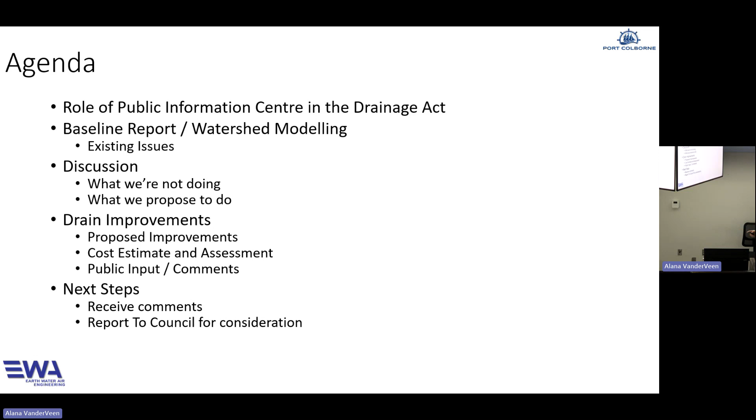If you have questions, I'm going to go through the slides very, very quickly so we get to the end. Then if you want, I'll back up to any slide you have a specific question for. This is where we are in the process - this is Public Information Center number 2.

Our goal is for me to deliver a final report to council for them to consider. They hear it three times and it gets passed as a bylaw. We do the work, it gets billed out - that's the general scheme of things. All the stuff on the right-hand side is the approval process once the report is done.

Right now, if you have specific concerns, I can fix it before the report goes to council - that's the purpose of this meeting, for me to hear what you would rather have or would like to see different. We try to accommodate everyone's views. We can't accommodate everybody's views, but we try.

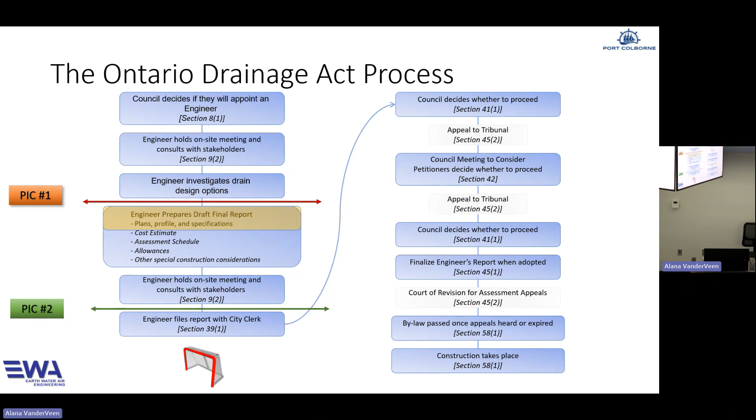We did do a baseline report. The baseline report looked at what's already there, looked at the problems, and this is supposedly looking at solutions. I'll tell you what I think solutions are, and you can tell me whether you agree or not.

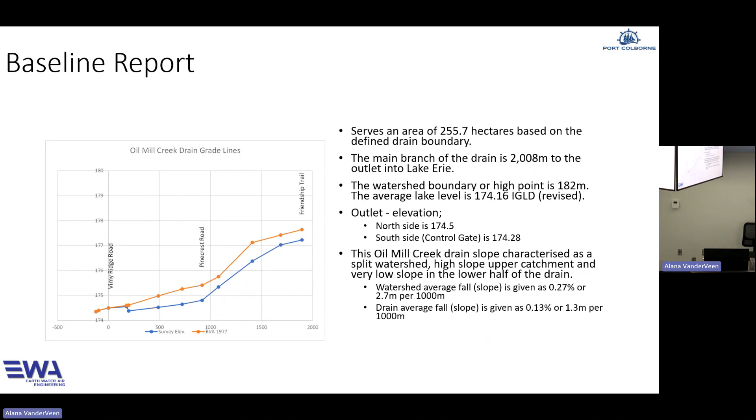This is just looking a little bit at the survey elevation versus the original report from 1977. The survey shows we're a little deeper than the original 1977 report, but I'm converting that from feet and inches, so there's a little bit of funny business going from 1977 feet and inches to metric. It's important to look at the general shape rather than exactly where those points are.

What you'll notice is that this drain is not a straight drain that goes from the lake straight up and ends at a bunch of farmers' fields. There's a lot of different pieces and parts. The E1 branch - I was going to point at the screen, but I don't know how to do that, there's no, yeah, thanks Alana - E1 branch runs up and goes backwards to the east. The main drain goes straight north up to the Friendship Trail. The west branch does this southwest wiggle that goes out past Pinecrest Road. And E1, E2, and E3 are off to the right by Cedar Bay Road.

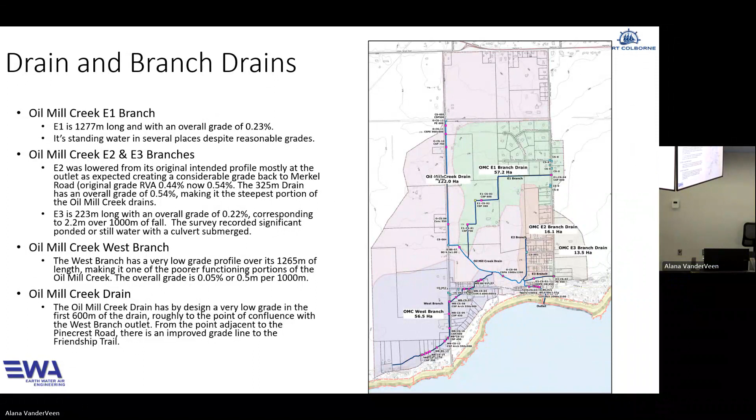This is just looking at the relative slopes. As you go north, E1, Cedar Bay, and Oil Mill Creek increase by 2.8 meters over their length, which isn't bad. Port Colborne's not famous for having a whole lot of slope to the lake. Some parts are pretty flat. Wignall Drain is 2 kilometers with zero slope. So in comparison, this isn't too bad, but the west branch, the blue one, at 0.64, doesn't have a lot of slope. It's what we would call terrible for slope.

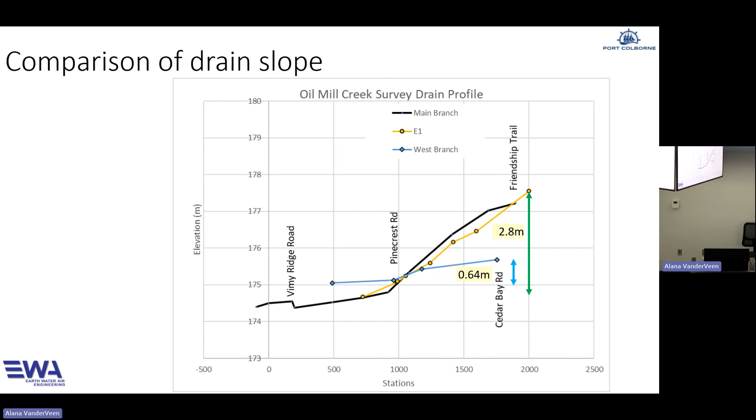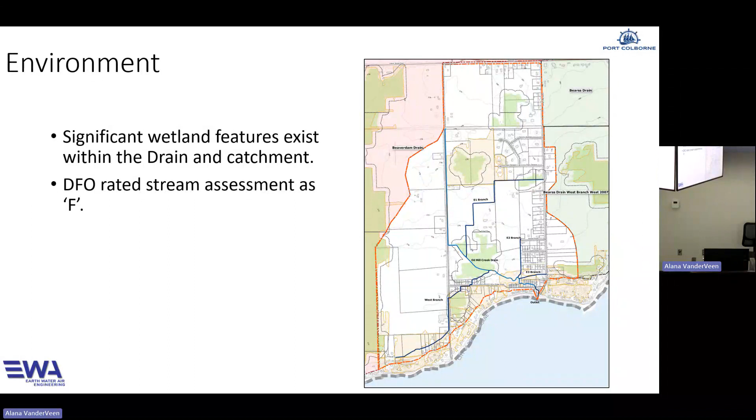There are wetland features that exist in the drain, and when you have compromised slopes, there's wetlands there. The benefit for us is the drain existed before the wetlands. If we go forward and say we want to drain a wetland, generally that's hard to do now. But if the drain existed before the wetland, then we can go in and do maintenance and make changes. But there's limits to what we can do and get approval for in an existing provincially significant wetland.

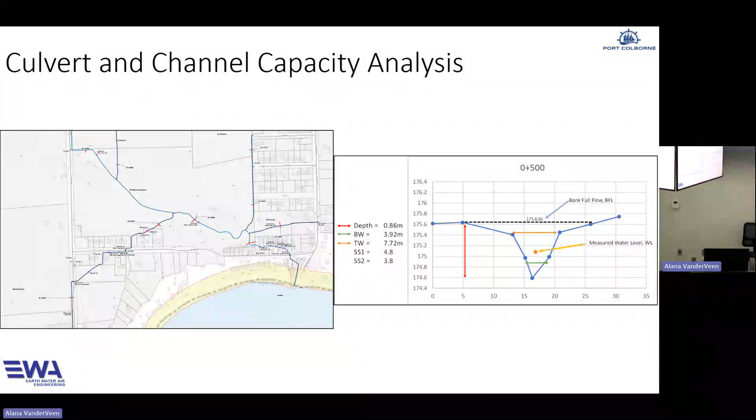So we set up a computer model and we analyze how this thing performs. The surveyors do cross sections and we calculate whether hydraulically it will pass enough water or not. And we build a computer model, and it looks like this. It gives you a profile of what the depth of water is going to be at different points in the watershed.

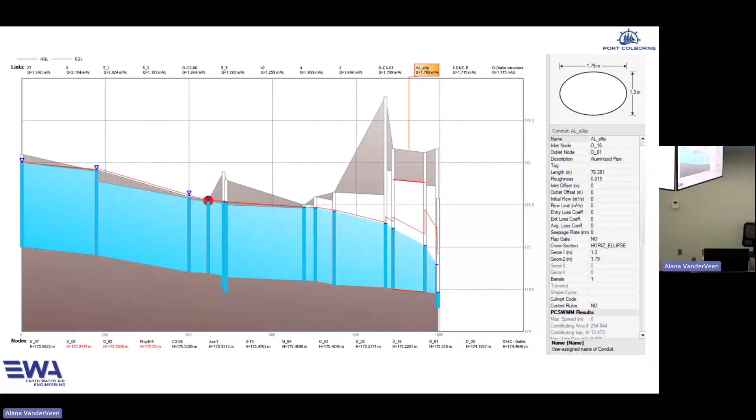The reason we do that is to find out what the problems are. One of the issues is that West Branch is so flat that its water arrives later than the water from the upstream parts. So by the time it goes out to the lake, everything's already full - that's what the basic computer model shows. And all of you will say, I could have told you that, you don't need to build a computer model. But we do the computer model because as engineers, that's what we like to see analyzed.

Maintenance has been performed, as Alana said, in 2008 and 2011. But in subsequent years, well, you guys know what the maintenance was. Culverts - there are a few structural defects, some that are rusty or at risk of collapsing. We've identified those for replacement. Some culverts are not quite as big as they should be, so we identify some that should get installed a little bit bigger.

The winch that controls the flap gate is a total manual affair. You have to walk out and stand on top of the outlet in order to operate it. And when the water was much higher two years ago, that was a little dicey at times. If you were late getting to it and the storm was already on, it was a tough place to go and operate the winch.

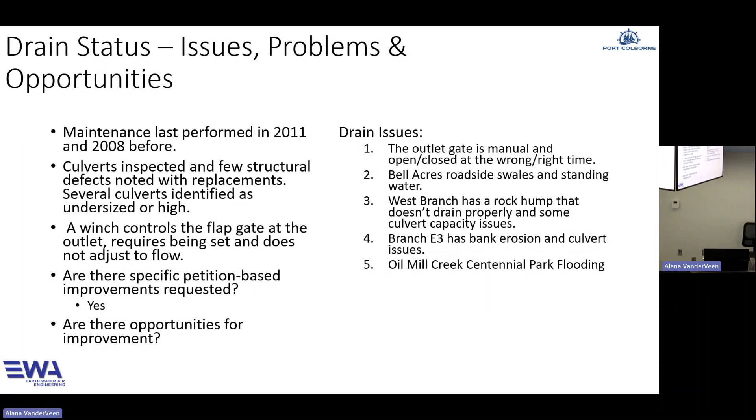So drain issues: the outlet gate. Bell Acres has problems in roadside swales, standing water. The West Branch - this goes back to the very beginning. When it was first created, everybody knew there's a rock hump in it. The original engineers identified on the plan to put clay in to try to level it out so it would drain properly. And E3 branch has some bank erosion and there's a culvert issue. And there's flooding in Centennial Park. So those are some of the things that we looked at.

And these are some of the things we looked at and we're not doing - which maybe that's a funny way to say things. But we looked at things, we tried to find a solution and it didn't quite work out. That's these things. So I'll actually come around here so that it's easier.

Start at the very top - whether we could do 2 new outlets. The existing outlet is a steel pipe and then a concrete pipe that goes out to the flap gate outlet, and it's flat. So the water has to get to a certain height to drive itself to the lake, and it has to actually get really full. I've got another slide showing this - for it to be a full pipe, it's very difficult for the pipe to run full.

So we looked at whether we could do what's called a diversion. When the water gets to a certain height, it has another path it can take to the lake. This runs through the middle of the park, and then there's this one over here. The trouble is the one through the park, if it's an open channel, it's massive - it's like 10 meters across the top because of the way the sand is to go out to the lake.

And if you use a pipe, well, it's not a path we can take without losing trees. So there's a challenge, and the pipe's not cheap. These do work, but you're looking at $250,000 for either one of these to go ahead. So we said no.

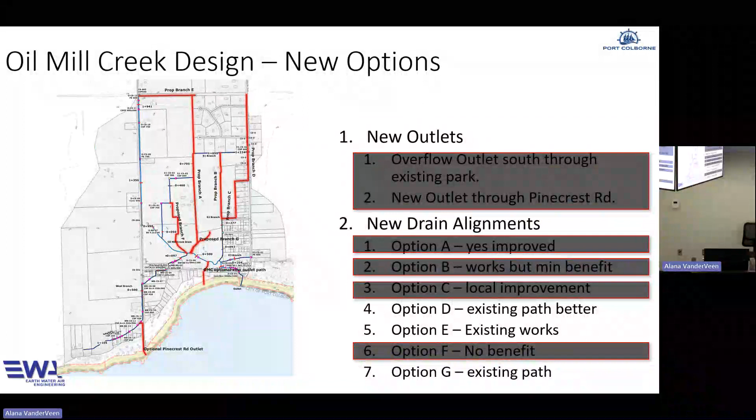So the part that we did do is the one that's west along the subdivision. There's already a channel there, but there's a way, and it's in the report and I'm talking about it tonight, how we make it part of the municipal drain. I think that's it. So what we'll talk about next is what's next.

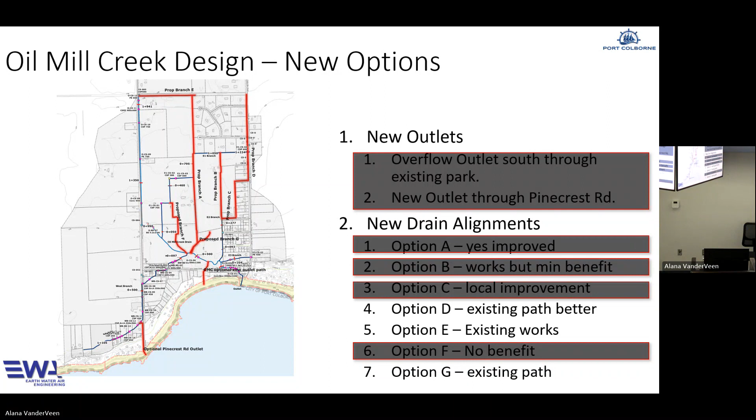So this is the one that goes up and to the right. There's flooding at the back of these lots, and this does solve that. But there's no way for me as an engineer to make this go forward. I need a petition - someone has to sign a petition to say they want this drain. So if you live in here and you're interested, and you can get half of your neighbors to agree, this could go forward and be part of this project.

Tell us more specific. We're hard to see.

So you have an access off of Cedar Bay as well? Oh yeah, there's no access there, but like my property does first. There's no driveway, so this proposed catchment goes to where his property touches Bay Road. That's kind of the basic part of it. The trick here is if we went to the road, then she could sign the petition and it can go forward. But in this case, the road's already serviced by a roadside swale and it works, so we can't really get the road to sign a petition. You'll see with the subdivision, we're using her as the road authority - Alana's being the road authority and signing the petition so the other parts can go forward. But in this case, we really need all the neighbors to agree.

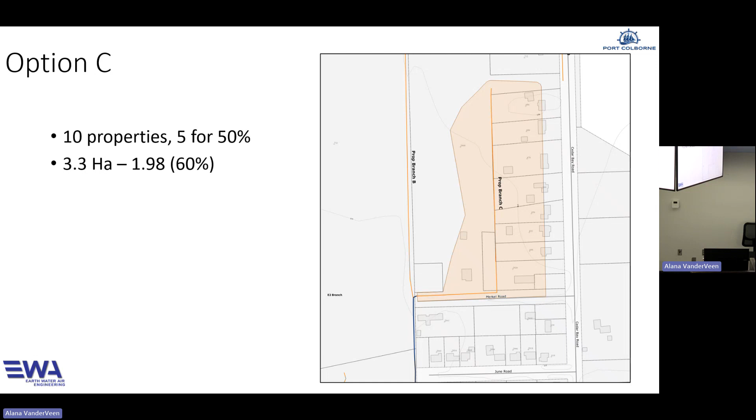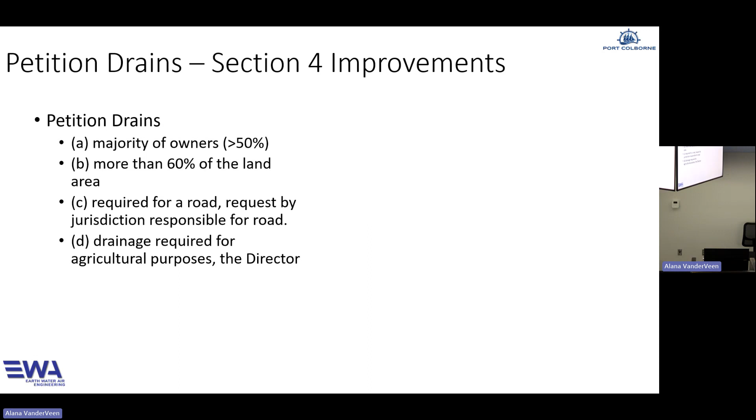This is about petition drains, where C is required for a road at the request of the road authority having jurisdiction. The other one, D, is by the director. I don't understand who that is under the act. I assume it's the minister or an appointee, but I haven't seen one where they've actually exercised D.

We did analyze returning the pumping. If anyone's been near the outlet, there's a little oval tank off to one side. In the 60s, I think it started being pumped, and there's a discharge pipe. We analyzed and estimated the cost to return it, not replacing the pipes, keeping them as they are. But I'd be concerned about whether they would survive a new pump, because the pipes are rusty and old, but sometimes rusty and old pipes are still okay.

We didn't analyze whether the pipes would hold together. But it's like $135,000 to put new pumps in there and bring three-phase power down from up at the intersection, basically where it is. We had a quote from Fortis for what that would cost.

The pump pulls from the pipe and then pumps through the little rusty pipe out to the outlet. It's just not doing enough the way it's set up, from the 60s, with the big steel pipe extended to Vimy Ridge Road, to be that much of a benefit. If you're going to spend that much, you might as well reconfigure the whole pumping system to pull from where it's open, not piped, and have a whole new path that goes to the lake. But it'll be more than that. So we've analyzed this. There's a small benefit — personally, I'm not sure it's worth it.

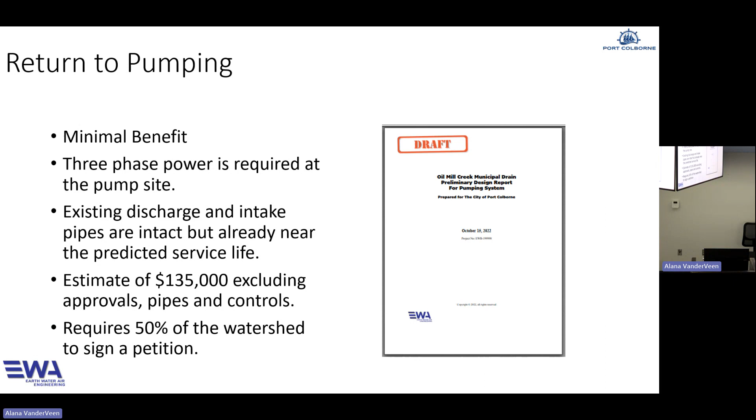So what we are doing — in my search through this, I found this letter from 1978. It's to the city engineer at the time, about what they looked at back in 1978. Not surprisingly, a lot of it's the same stuff I'm talking to you about tonight. The difference is in '78 they didn't do anything. They looked at a new outlet to the lake and decided it was cost prohibitive.

They looked at changing the flap gate to what's called a knife gate or a sluice gate, so instead of opening and closing, it goes up and down. The problem is someone still has to make it go up and down, so in my view it doesn't work any better than one that opens and closes.

There was flooding along Cedar Bay Road, and they said if somebody petitions for a new branch, that could go ahead — what we just talked about. Flooding around Vimy Ridge Road, they looked at an outlet through the park and said it would be too big of a channel. The outlet through the park, if it's a pipe, it's reasonable to see it could go, but it's still going to cost a significant amount of money.

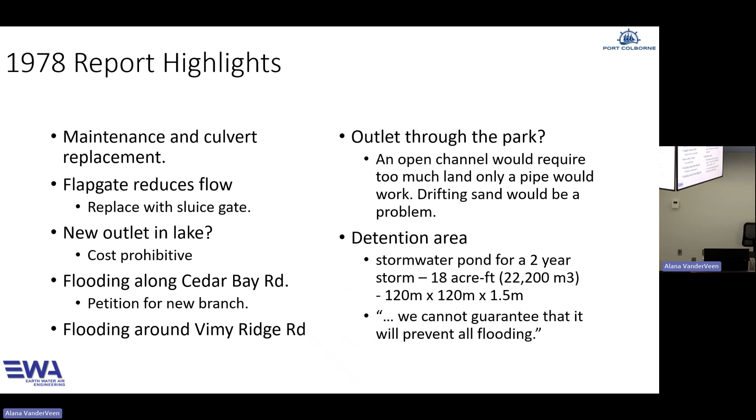And the last one, they looked at the detention area and calculated it would need to be 18 acre-feet, which for me, metric, is 22,200 cubic meters — massive, way bigger than what we could fit in the park. So we have analyzed and recommended putting in a wetland, but it's not that big.

So, control structure considerations — we talked about pumping. The existing pump structure hasn't operated for a long time. It's possible to put it back in service. I can't tell if the pipe that draws water into the little oval — it's got rust in the bottom, mostly it's okay, and the pipe over the top is rusty but mostly okay. But you could run it for a month and then break something, and then you're stuck fixing and replacing the pipe.

Control structure: runoff flow through the openings for a 1-in-100-year storm — it's a big pipe. There's a storm surge, so the gate closes, but it's on a winch. We looked at modernizing it. We have some other modernizations at other places in Port Colborne.

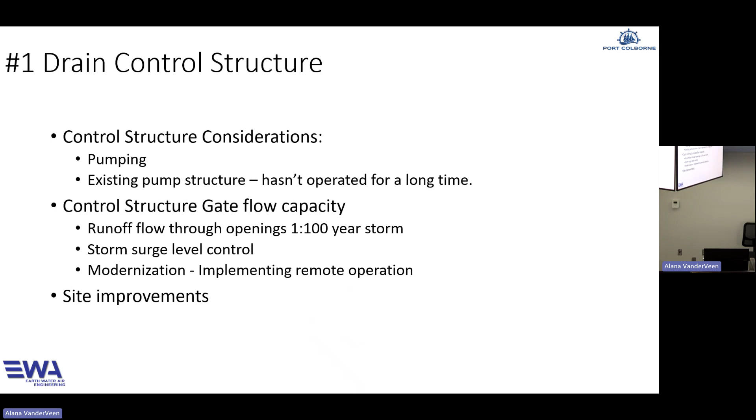So there's comparisons — this is what the computer model says happens at the outlet. I'm going to point out a couple of things to orient you here: Vimy Ridge Road, this part, it's a rectangle — that's where it goes from open and crosses the road. The other side, right through here, is the steel pipe that was put in 1999. The concrete is this last little bit, and the last little drop here is the outlet.

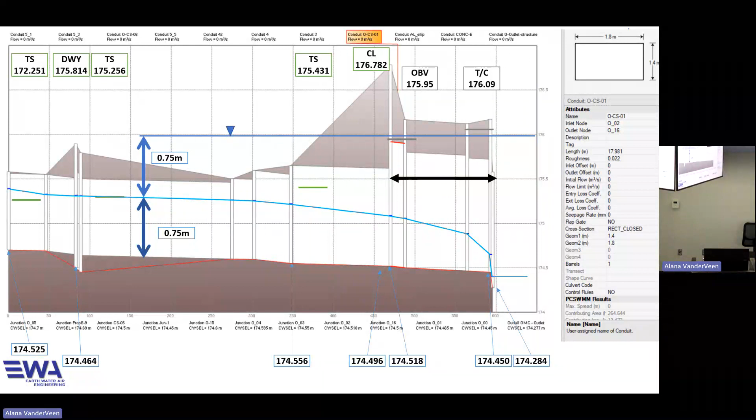This is through the park. These are the twin culverts that are the laneway in the park. So what happens is, if we want the pipes to be full of water, the park has to have 5 feet of water in it for the pipes to even come close to being full. And that's part of the challenge with the outlet. It's big, but it's tall. What you need is more width to have enough capacity. Even though the pipes are ellipsoids, wider than they are tall, it's still a challenge to get the park deep enough to run full water.

This is Alana's picture, I think, from February 28th. We had a little mini melt, and there was a whole bunch of water running out. The park was full. She didn't get a picture of the park to compare, just the outlet. But you can see the gate's wide open and it's running, kind of like the computer model. It's running really well, but it's not full. It's not even to the midpoint of these ellipsoid pipes.

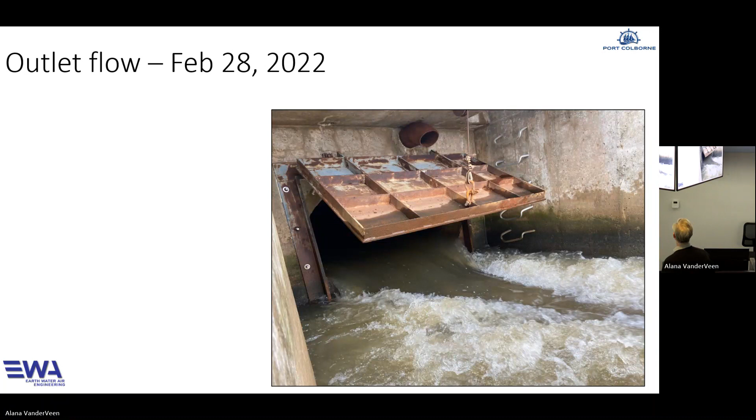This is what you don't like to see. The gate's closed, but there's water that wants to get out. So we did a calculation, basically with all the steel that's in the gate, it's 1,000 pounds. So unless the water is pushing with 1,000 pounds of pressure, it won't push the gate open.

So one of the things we looked at is what can we do to the gate? We can automate it. Instead of a winch, we could computer control it. It's a lot of money.

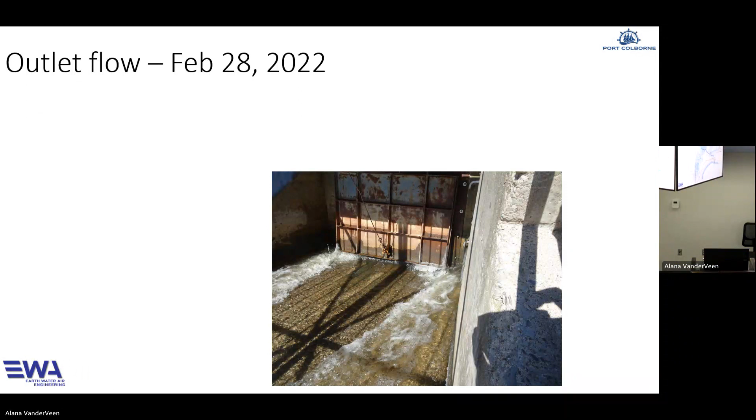I'll show you what we got as a proposed solution. I'll show you in a second.

But these dots, it goes back to how deep the park has to be. The deeper dots are 175.5 to 175.75. So once the park channels go above that and it starts to spread out...

I should point out what the dots come from. The dots are from 2012. They flew an airplane over and gave me a dot every 10 meters with the elevation the airplane picked up. It's plus or minus 20 centimeters accurate, which is like this. So it's not as accurate as the new data that's available. The new data is 2 centimeters accurate, way better. But this is what I had as the 2012 data.

And I'm coloring each dot based on how deep the airplane says that dot is. So the color represents where the water's deeper. And if it's 176, which is the flooding we would expect to see, the pipes are still just barely running full. They wouldn't be running full, even at this depth.

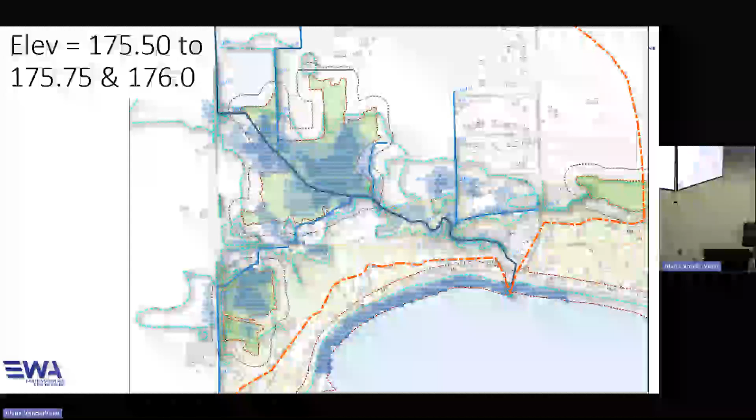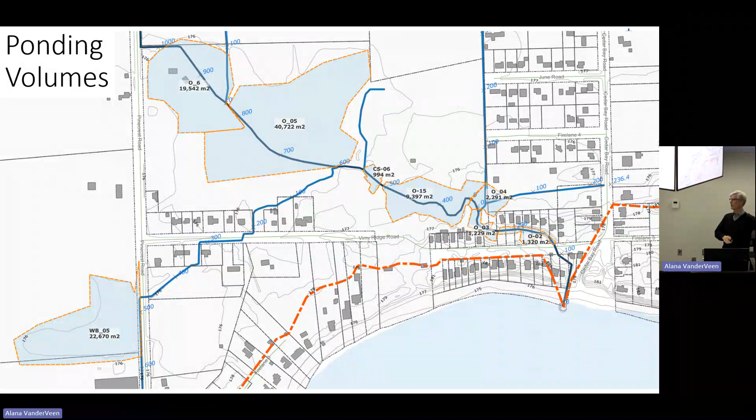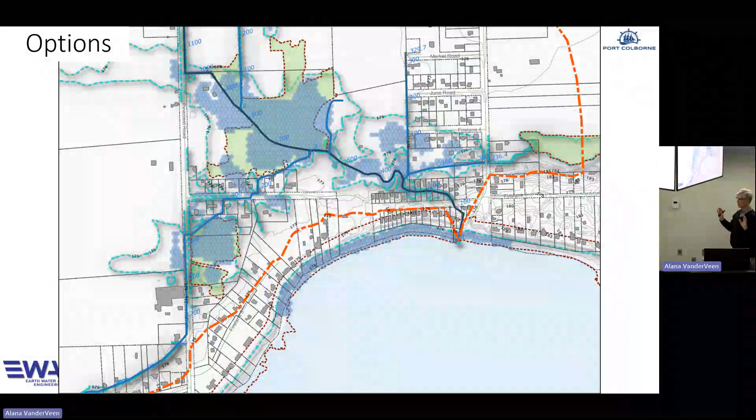So in our model, we actually do consider how much water sits in the park. We look at how fast it tries to get out, how much water sits in the park, how much water is coming down from the north. That's the benefit of what the water model is telling us. This is the same as before, slightly different color, but the blue line is 176, so it tells you the extent of what flooding would look like at 176.

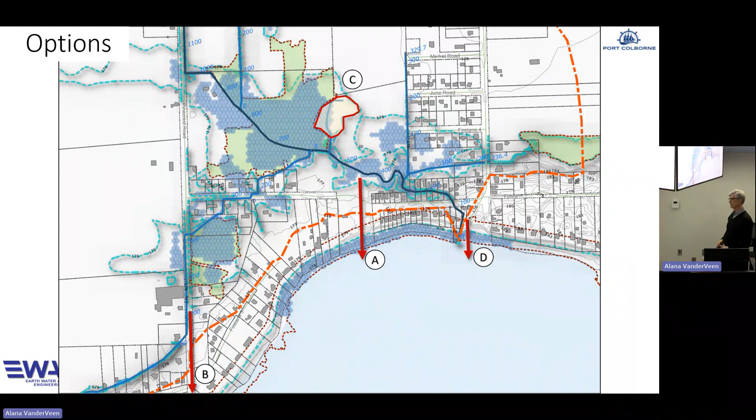I'm just going to go to this and explain. So these are the two changes that we are recommending that would benefit. Number one is move the winch from on top of the outlet back to where the stairs used to be. So when I started this, there were stairs.

Last time I was out there, there were no stairs, but now there's a concrete pad there. So we won't use the same winch, we'll replace it. But instead of somebody having to go out and stand on top of that, it can go where the stairs used to be, for anybody.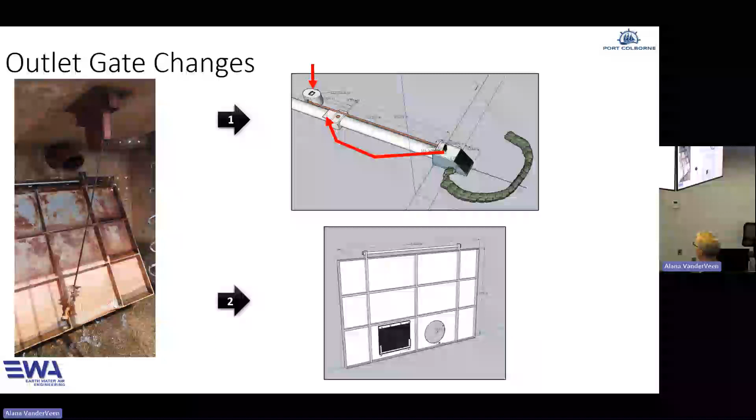And what I wanted to say is, under the act, I have to follow what the act says in giving allowances. But this would have been better done when it was subdivided. Not now, 10 years, 15, 20, not later, right? Because at that time, the developer would have paid those allowances and assessments. Now it's shared as a group, that the allowances are direct to the property owners or where the drain sits. So they get paid, but really the original developer should have paid for everything.

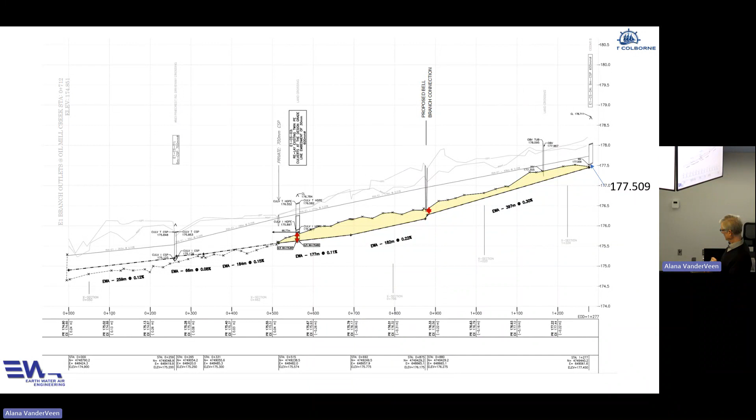Go east, not north. No, north. Let me go back. So the next slide is the part that goes up here and across here, the original E1 branch.

So I have to lower E1 first. If I can make any improvements in the ones that go north and east. And so if I can get E1 to go down, then I can improve this. If I can't fix E1, I couldn't do anything.

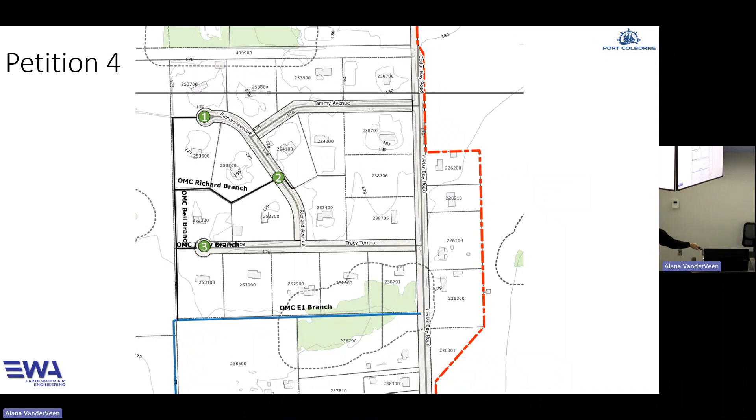And originally, we looked at doing this by connecting this straight through the park. And that looked really good until the rock was pointed out. And so we went back and we said, what do we have to do with E1? Make it work better. This part is actually in the wetland. And so there's no point making it deeper in the wetland. It's already a wetland. And this is the private road that's going back along E1.

We start there, and this is E1, and these are twin culverts. So these ones will have, there's two culverts there, relatively new ones, polyethylene. They'll have to go lower in order for this grade to work. And I don't know if you can see it, but this line going through here is the original engineer's line, and it's a straight line.

And so, you know, it's gravity. It's not genius engineering or anything. I'm just lowering the middle so that it's deeper and slower at the bottom, but I get an improvement through the top. And the main improvement is right here, where there's a connection to Bell Acres.

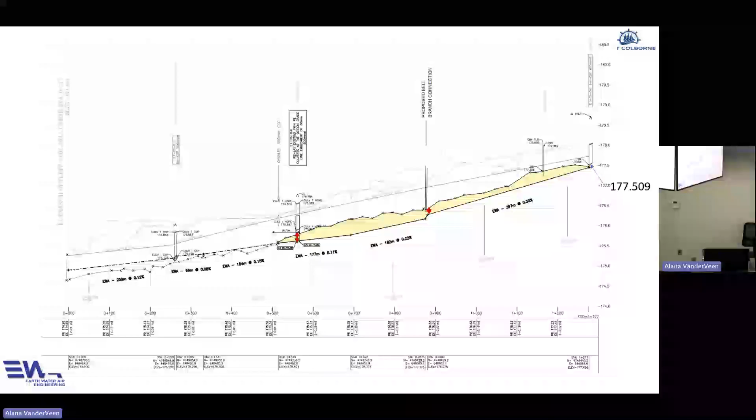That's what this looks like. This is that same connection to Bell Acres. And I'm lowering by basically 8-10, almost a foot through that west side of Bell Acres in order to get an improved drainage. There's one caveat in all that.

We didn't check that for rock. There's rock not that far out there. So I'm hoping 8 or 10 inches is okay, but we could run into rock through there too. But, you know, 8 or 10 inches is an improvement. It's an improvement, but it runs it faster to the bottom.

And that's the second part of what Bell Acres has to accept. Under the Drainage Act, there's a benefit and what's called an outlet liability. So you get a benefit from the drain, but you're liable for what your water does downstream.

So what we do is, this makes it run faster. It's better, it's lower, it's better. But it makes it run faster, which isn't good for your neighbors that are downstream. So generally in engineering, when we have a subdivision, we call it controlling post-development flow to pre-development levels.

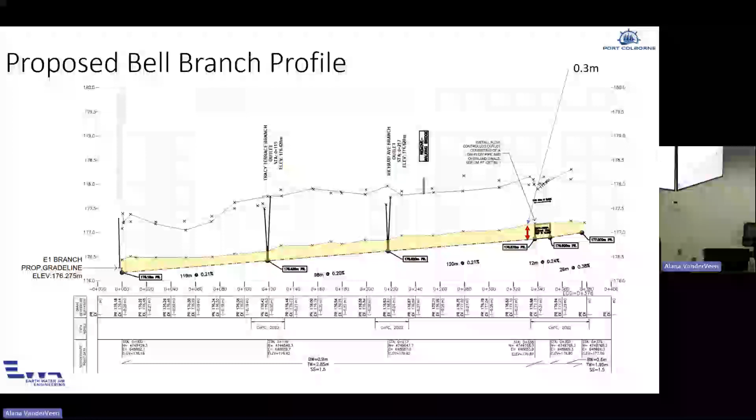It's lowered, so it will make the water drain away better after the storm goes past. But the ditches, the channels will fill with water. It will slow the water down in the subdivision and let it out over a longer time to an 8-inch to 10-inch deeper level, and then I can have a better picture. Well, this is just what the computer model says.

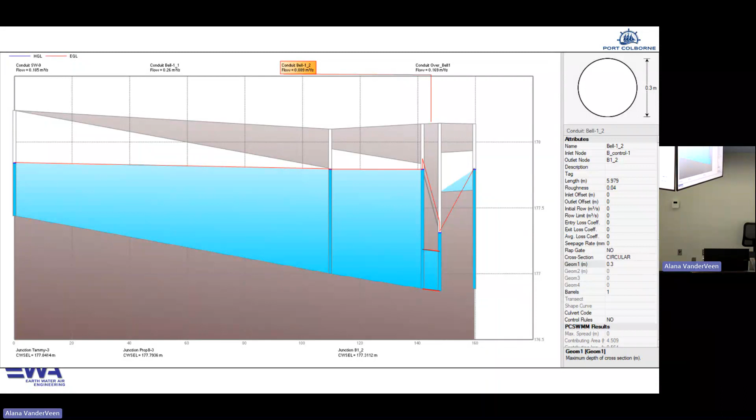It's composed of a pipe, and then there's an overflow swale on the top. The overflow swale is set up so you can run the lawnmower through it, and it's 8 to 12 inches deep. So once the pipe in a big storm is running as fast as it can go, it flows over the top into the channel on the other side.

It looks like that in the diagram, right? This is the pipe. It's 30 centimeter polyethylene pipe, smooth wall in the end. And it's lower. It runs all the water off eventually, but it causes it to slow down.

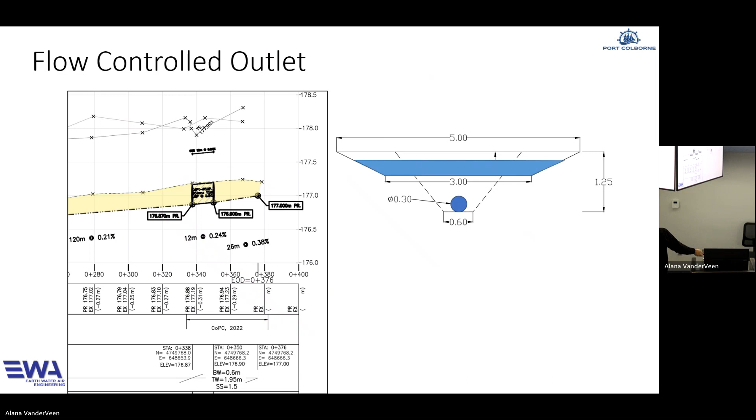And then there's 3 of them in all of the road petitions. Each of them, you call the top one Richard. Tracy. Tammy. The top one's Tammy. It's Tammy, doesn't actually get to it, but it's all its water that's going out there. Richard's the one that goes through the middle, and Tracy Terrace is the southernmost one.

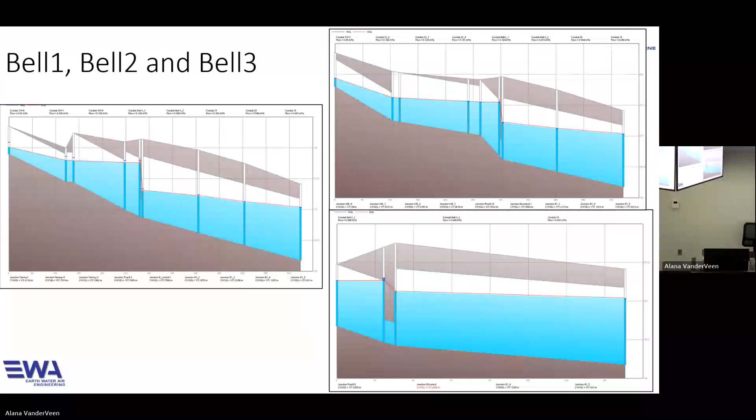This is what it looks like from the computer model, and I'm showing this because it comes in with the peak and it's knocking the peak off. That's what we want to get out of the pipe. Is when we don't control anything, we get this really sharp peak. The water rises quickly and it goes back down quickly. This is spreading it out to a longer duration.

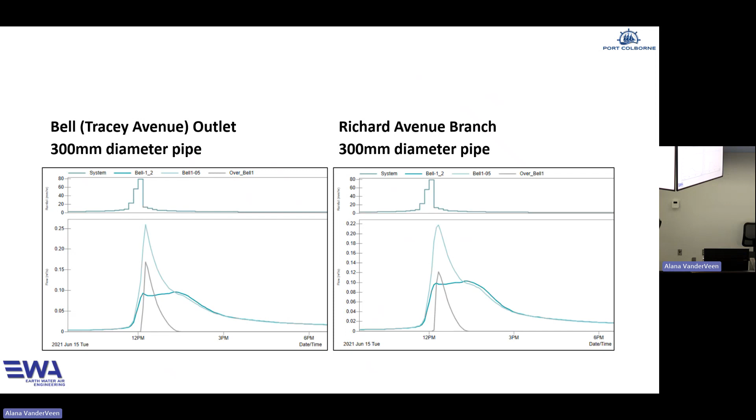And besides that, that's all I can do simply and cheaply, is to put in a too small culvert that backs water up with the storms, lets it out slowly. But each of the property owners there can do measures on their property to slow runoff down.

You can direct your downspouts into what's called rain gardens, infiltration trenches. I put that up there because we always say it, but there's so much rock up in that subdivision, I don't think infiltration is a really practical thing to try to do, but anything that slows the water down is a benefit.

If you want to look at this and Google it, you can Google the Sponge City Initiative. This is one of Montreal's things. They want the water to slow down, so they want it to be soaked up by their landscape, not have it be so hard and just run off quickly. Everything's about slowing the water down.

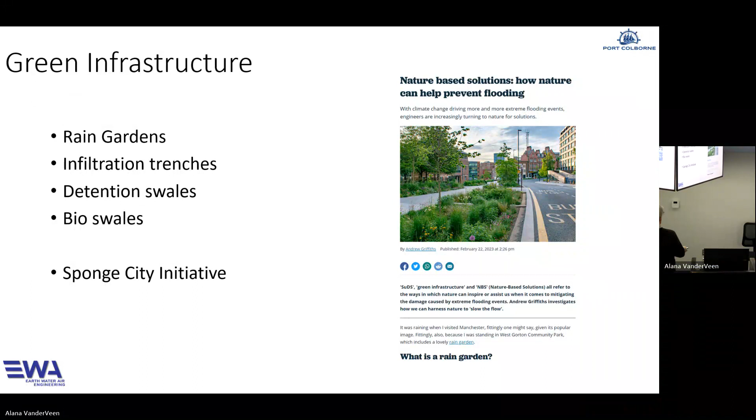Now I'm going to talk about the West Branch, and the West Branch is a pretty simple message. This is the proposed grade line, and this is the rock hump. We're going to take the rock hump out.

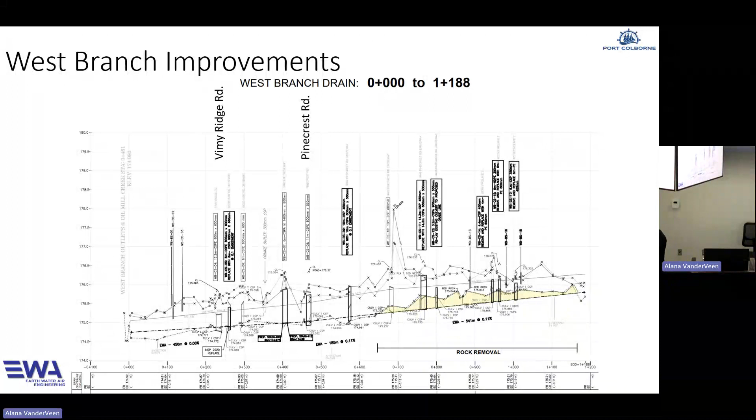It's not easy, but the machines are better now. They run on a hydraulic thing. You break it up so there's a drain point that matches the grade line, so the water gets away. And then kind of the only part that's not great is all the people that have to lower their culverts so that they match where we end up. Some of those culverts were too small anyways, so we're making them a little bigger as we go.

E3, it was a horse paddock when I was there. Yes.

The culvert that's there is kind of messed up, so we're putting in a new culvert. Not as deep, but it has to be reconstructed. And the channel goes in as a low flow channel with rock and then a wider channel up above. The hope is that the low channel drains it out so that the wider one keeps its shape. But it's really the low one with the little rock bank that should keep its shape.

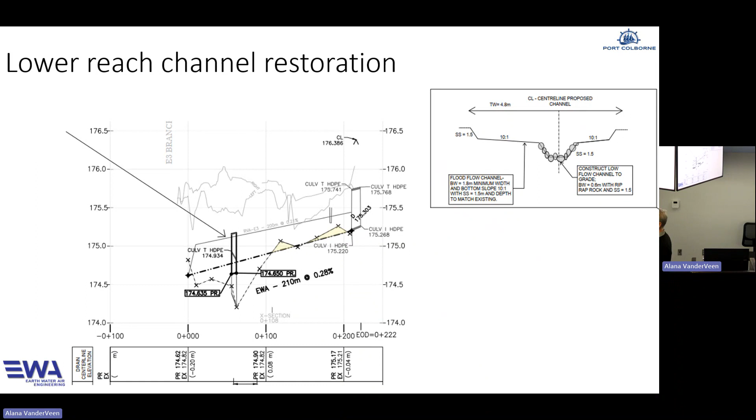And then there's where the fence is, we want to make that an access point. Does here, yes.

When we've talked to NPCA about this, they were okay with it, which I was kind of surprised. But E2 and E3, original E2 connected right on this bend, and so part of it is pointing backwards to the way the drain goes. So we're proposing to realign it to this point so that everything points to the outlet. It's not a big thing, but it is a better geometry for the flow to get to the lake.

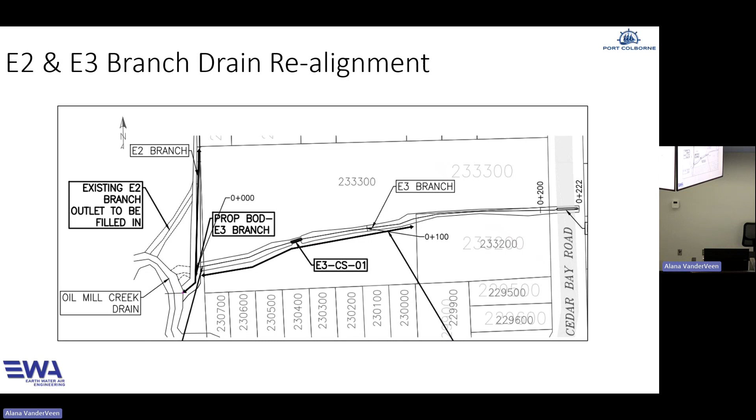So this is part of Centennial Park, right where the culverts are, where the rock comes out of the West Branch, we're proposing to reuse it in that area. The culverts, the bottom of them is deeper than the lip at Vimy Ridge Road, so there's no way for those culverts to run the water that's in the bottom out because they're deeper than what Vimy Ridge Road will let go.

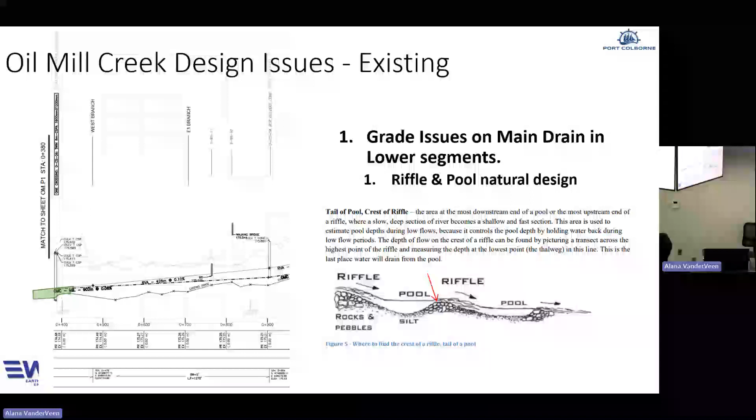So these riffles don't create any capacity. All it will do is change the water quality. Right now the water sits, and the riffles will alternate between a pool and a shallower area so that when it runs, it just alternates between there. It's not a massive benefit. We're just going to use the rock that comes from the West Branch and do one or two riffles on the upstream side and what's called a plunge pool on the bottom.

So it looks like this, where the culverts come out. Generally, we would do this because it's better for the fish, but the Department of Fisheries and Oceans has rated this and said it's not a concern for fish, because of that flap gate. There's not really fish habitat behind the stream, which is a benefit for Alana, because whenever you want to do something and there are fish in the drain, she has a lot more work to do.

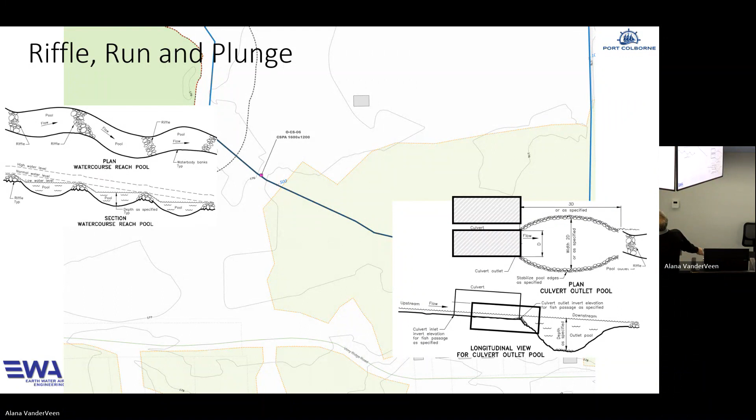And this, it's just that little part. This is the proposal for the wetland. We changed that shape a little bit, but it comes in two parts, the west lobe and the east lobe. The original plan was better, when we ran it in from the north, it ran in from the top and out the bottom. That's a nicer geometry to fill it than what we're doing now, because we're not running from the top anymore. Now I have to fill it back.

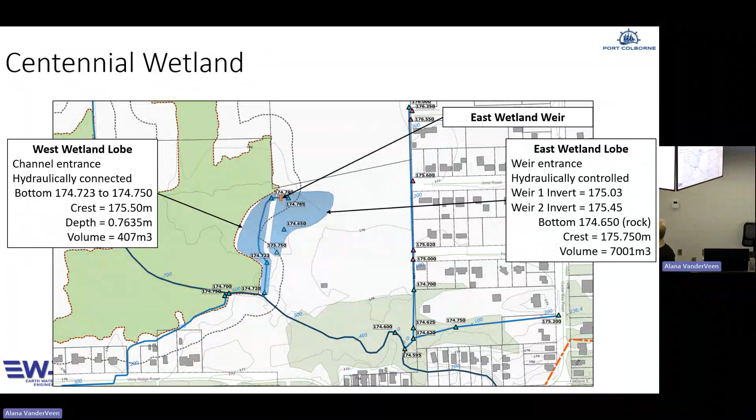The model says it works, but it's a computer model. So the proof of the pudding is when it actually does work. I don't want to say I don't believe computer models, but there's a limit to what it will really tell you. In this case, we're trying to give the water space to go so the West Branch can get out. But there's going to be a really big storm and it won't matter. Everything will fill.

The storm we're talking about is 68 millimeters of rain in a 24-hour period. The whole report is based on hitting that as a target. But we had a storm July 17th, 102 millimeters in 14 hours, and we were out surveying the next day. We heard a lot of comments, but that 102 is bigger than what our design is for. So yes, everything will still flood.

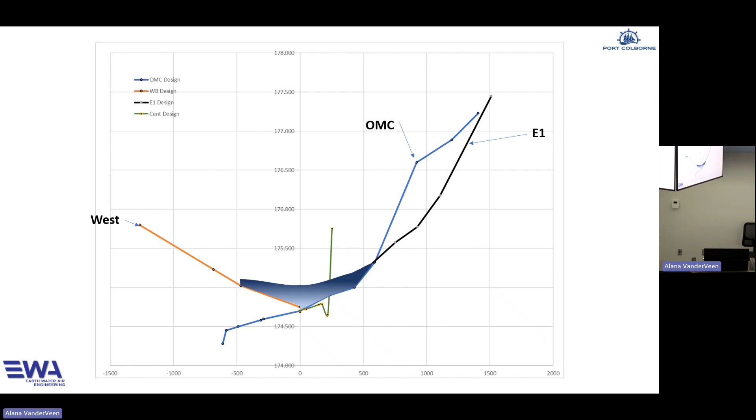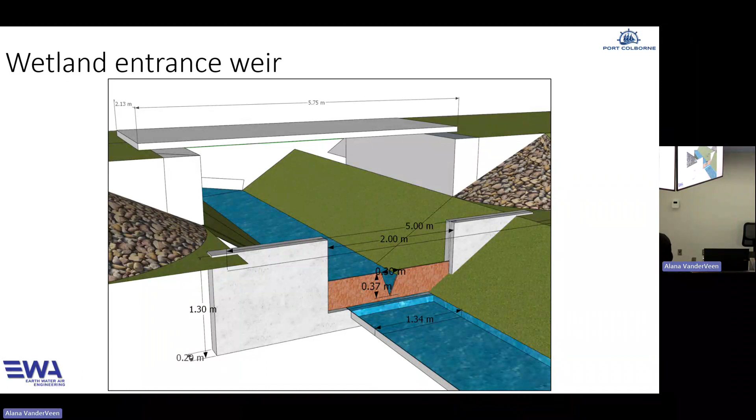It looks like this, I've got three slides. This is when it's filling through that notch. This is when it's all full, you can still see the water's quite high in through the park and above. And this is when the storm's passed, and now it's coming out. Some of that weir keeps it in forever, so we call it a wetland because the lowest part of it keeps water.

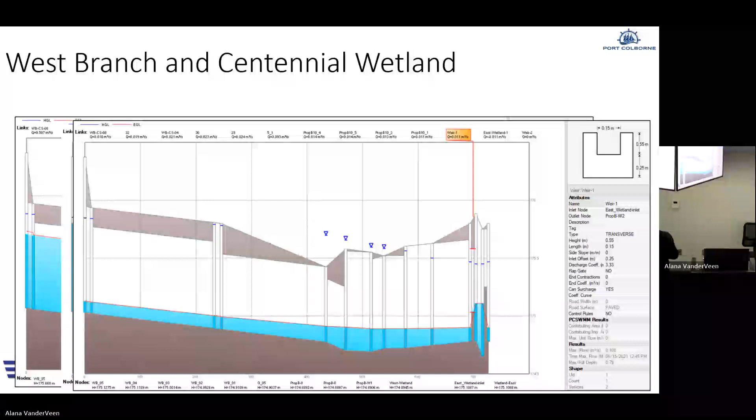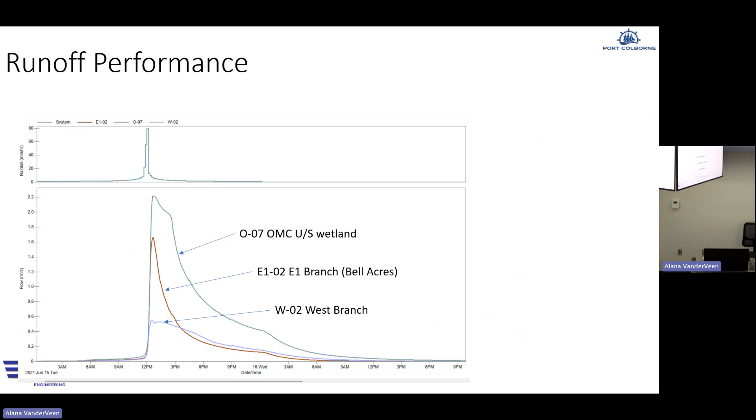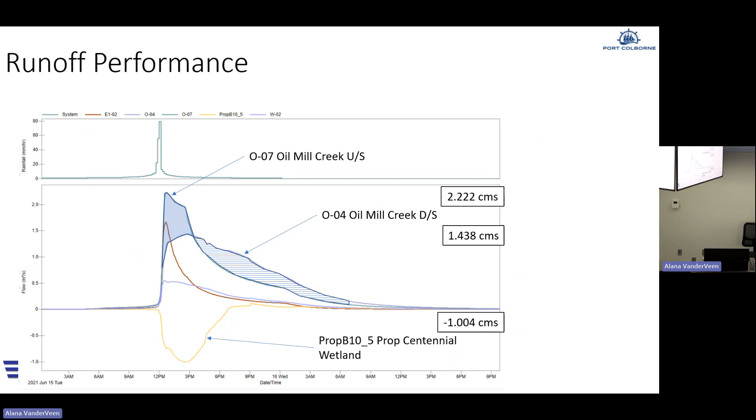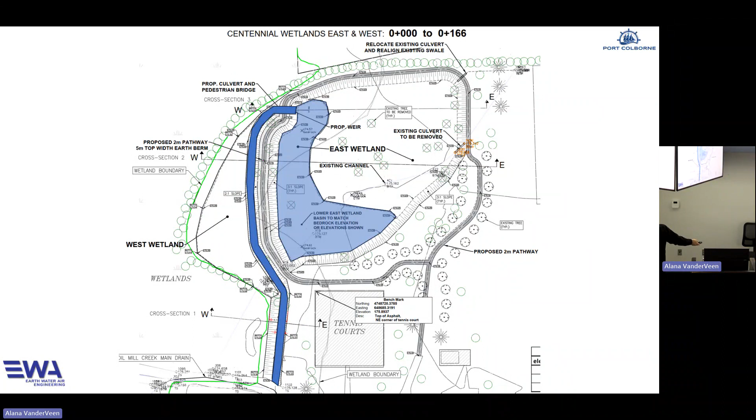That's the path that fills. That's the lower wetland, that's the part that floods. And this is kind of what the whole flood would look like.

And now this is the slide everybody's been hoping for, the summary. Gate improvements: very simple, a new winch and a way for low flows to escape to the lake. Without the gate being adjusted, it's still better to open and close the gates on the proper timeline.

A lower grade line improves benefit, but controlled outlet is key. So the subdivision gets an improved grade line at the cost of controlling the peak flow with the culverts. The West Branch gets the rock hump removed.

E2 and E3 have an improved alignment to the main, and there's channel changes in the Centennial Park wetland to give the water someplace to go rather than just flooding everywhere.

And the last one is, throughout the whole system, there is still maintenance to be done.

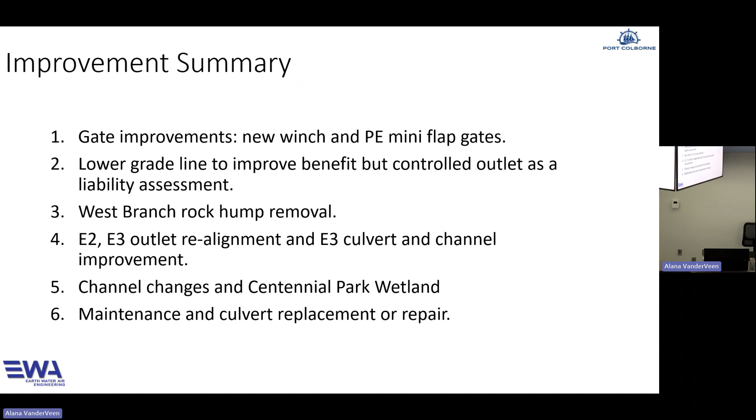So the total of this is $623,199. It's an estimate - like, I figured out what the winch is, but I'm guesstimating what it would cost to put it in place. And there's $227,000 in administration, which includes my costs, but some other costs are in there as well.

And $15,000 in allowances. This is mostly payments for land that we're taking for the channels up in the subdivision. So even though there's a channel there under the act, I have to pay the person for the land that's being taken, because it's still their property.

And then I have to pay the original construction cost less the maintenance cost. So there's a payment that's worked out and paid for that.

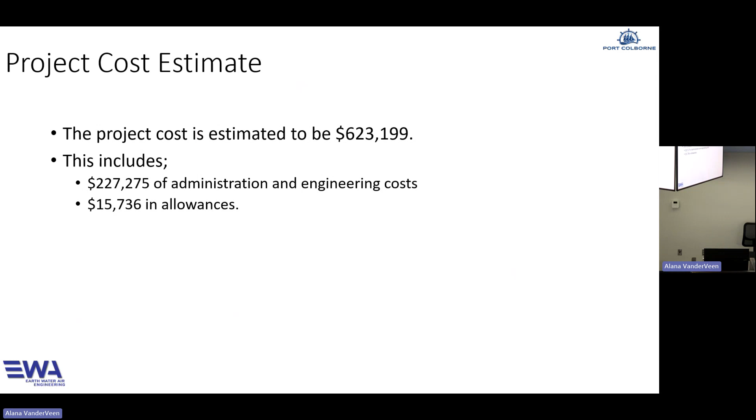There's a culvert to go in up there, right at the Friendship Trail, but I think the municipality picks up most of the cost of that new culvert.

And the wetland, even though we're just digging out a big hole, it still has some cost to it - all the spoil gets left on site. There's new legislation effective last year and into this year called excess soils. If you move the soils off the project site, you have to have testing done. As long as we keep it within the drain limits, then we don't have to do the testing.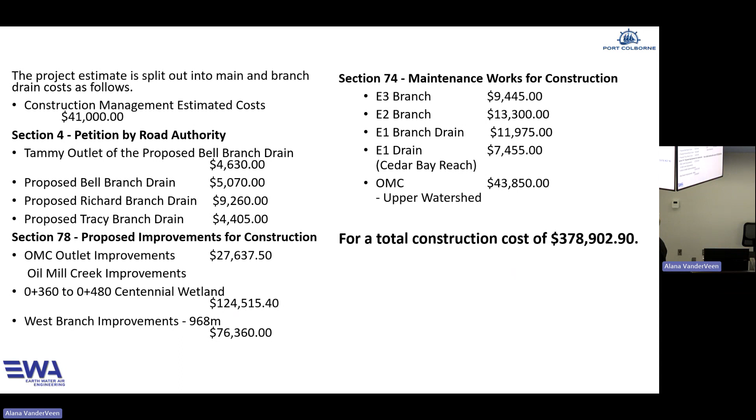Next steps: I've finished my report. I get to hear whatever you want to tell me tonight, and I'll try to accommodate that. The report goes to council, they allow it to go forward, and there's a meeting to consider finalizing it.

If anybody thinks they're paying too much for assessments and they want to challenge it, then there's a court of revision, which is councillors here. You present what your argument is to change the assessment, and the council can then direct me to change the assessment.

If people are still not happy, you can appeal to the tribunal. If you want to know how that whole process works, Alana or I can get you some information. The ministry is working on a new homeowner's guide to the Drainage Act, which will also explain that. But there is information available that explains how the appeals process works. Once the bylaw is passed, then work can commence.